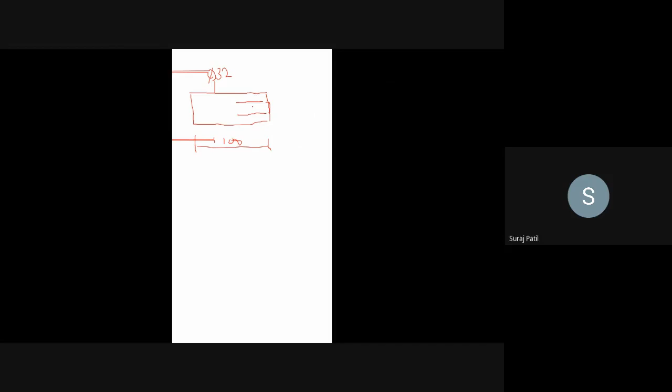There's a bar of diameter 32 mm and length of the given job is 100 mm. You need to turn, that is remove the material of the given shaft, such that the diameter at the right end should be turned to 25 mm, and the length of the turning should be 30 mm. This is the job given. You can see here 40 mm; I am going to say this should be 40 mm.

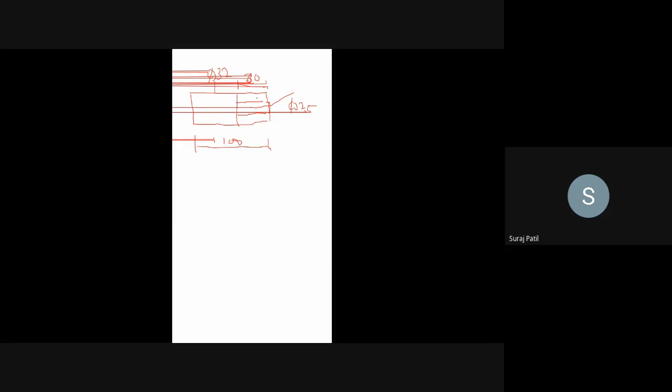This material needs to be removed using the turning operation. So you can see this is the job given. The job size is 100 mm length and 32 mm diameter shaft, and you need to turn that given shaft to a diameter of 25 mm for a length of 40 mm.

Always remember in Fanuc lathe, the axis system that we use is XZ, where X indicates the diameter of the job and Z indicates the turning length of the job. Before starting any turning job, you need to first locate the origin of the job. The origin is always located at the extreme right end, at the center of the right face, as shown in the figure. So this point, 0 comma 0, is the origin of the given job.

The operations based in this particular job are: first you need to do the facing, and then you need to turn for a length of 40 mm, such that you will reduce the 32 mm diameter to a 25 mm diameter.

For this particular job to be programmed in the Fanuc Lathe Denford software, you should know all the G codes and M codes. I am assuming that you are familiar with all the G and M codes, and accordingly I am proceeding further. If you don't know them, please go through the meanings of the G codes and M codes available in any CNC or CIM textbook.

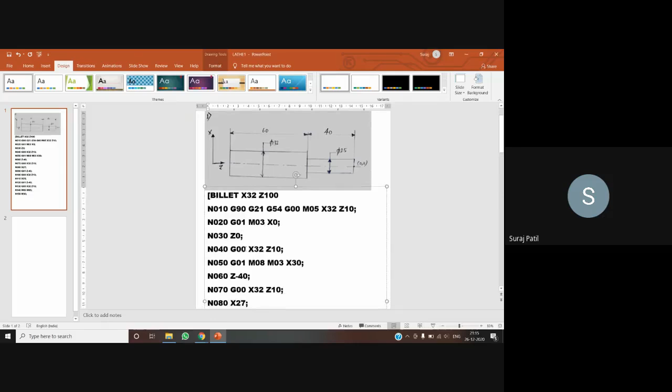Then from 30, that is from diameter 30, I'll reduce it to 27. So here I need to use G01 because I need to cut the material. So for cutting the material, you should use G01.

Otherwise, if you miss to give this G01 here, what will happen? The software will understand the previous G codes and automatically it will not cut material here. So earlier it was G00, so if you don't give G01 here, it will take G00 and proceed further. So now I have to cut the material, that is why I have used G01 X27.

So from 32, I have reduced it to 30. So again I am reducing it to 27 for a length of 40 mm. So now I have reduced it to 27 mm. Then again I'll get the tool to some safer position, that is X32 Z10.

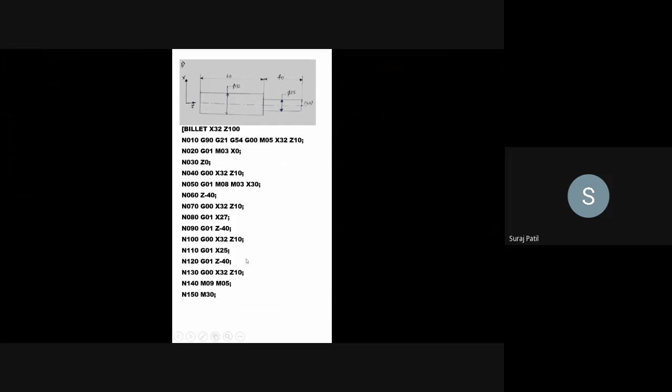Then again I'll do the machining, that is I'll do the turning, that is G01 X25, which is the required diameter. So you can see, where is that? Yeah, X25 G01 Z minus 40.

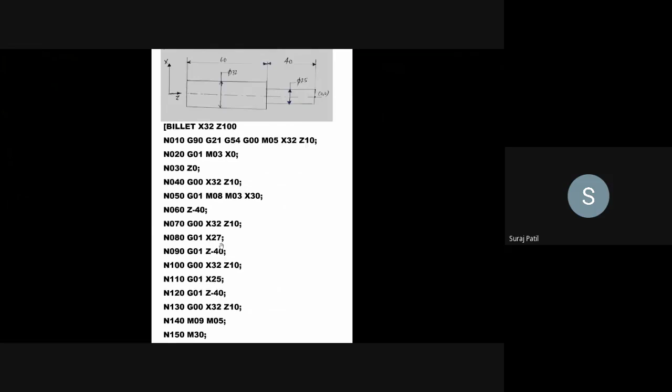So from 27, I have done the turning to a 25 mm diameter, and I have cut for a length of 40 mm, that is turning length. So you can see, I have reduced the given job to a 25 mm dia, and so my operation is complete because this is the required dimension I should have in my job. So that is why I have completed the required operation.

Now I'll ask the tool to get to some safe position, that is G00 X32 Z10. Then I'll make spindle off, that is M09 M05 M30. So this is program end. M05 spindle off, M09 coolant off. So this is the first program.

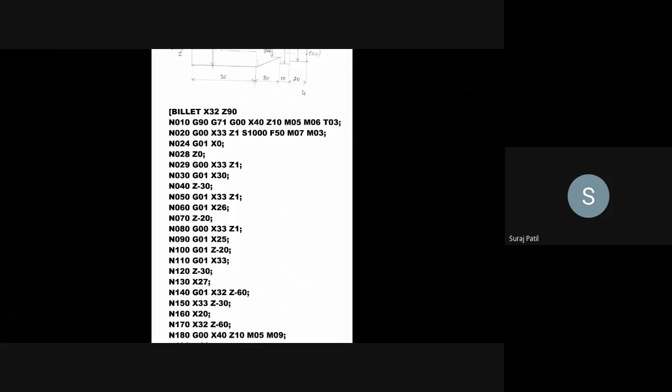So this is the job given. This is a shaft of diameter 32 and length 90 mm. You have to do a step turning for a diameter of 25 for a length of 20, then after that there is a step of 30 mm dia for a length of 10 mm, and after that there is a taper from a diameter of 20 to a diameter of 32 mm for a length of 30 mm.

So initial things remain same. I located the 0 at the left, right extreme face at the center point. First I'll do the facing operation, so I'll specify the size, that is square bracket billet x32 z90. You can see 30 plus 30, 60, 70, 20, that is 90 mm, and diameter is 32 mm. So this is the total size given.

Then first sequence number, that is first line, G90 G71, that is absolute metric. Earlier I had used G21, so you can use G71 also. G0 rapid traverse, X40 Z10, that is some safe position, that is just 5 mm above this and 10 mm to the right from this 00 position. So this is somewhere here. This is my safe position of the tool.

Spindle off. Then M06, there is one more new M code, that is M06, that is tool change. So I'll be using tool number 3, that is T03. Then G00 X33 Z1. So from this X40 position, I'll just bring tool to just 1 mm above this and 1 mm to the right side, somewhere here. So I'll ask the tool to come here.

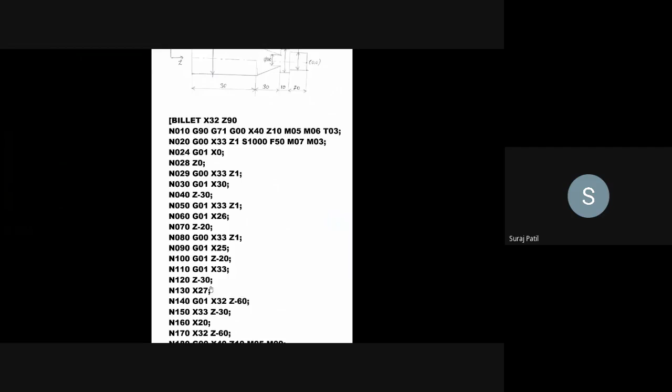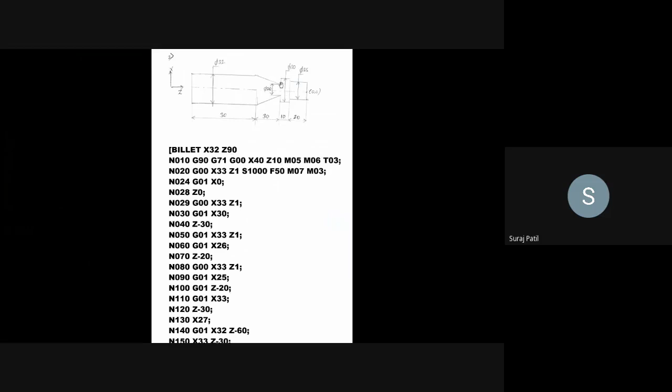So I'll give G01. Now from this 33 mm dia, I'll ask the tool to go to x27. So what will this tool do? From this x33 position, it will come to the diameter 27, getting digged into the material to a diameter of 27 mm. Then I'll specify G01 x32 Z minus 60.

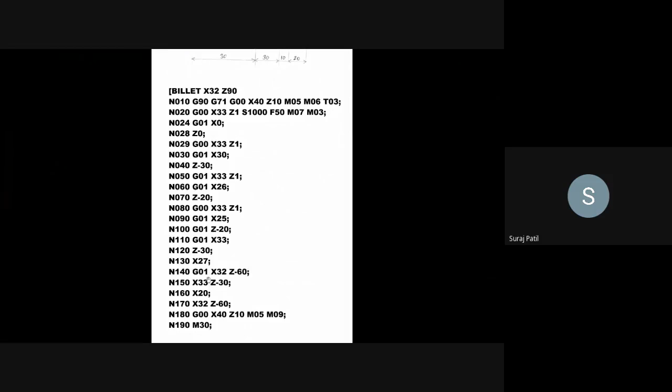That means from this 27 mm dia, it will directly do this taper, drawing this particular line. You can see x32 is this diameter. What is the length? 20 plus 10 plus 30, that is 60. So G01 x32 Z minus 60.

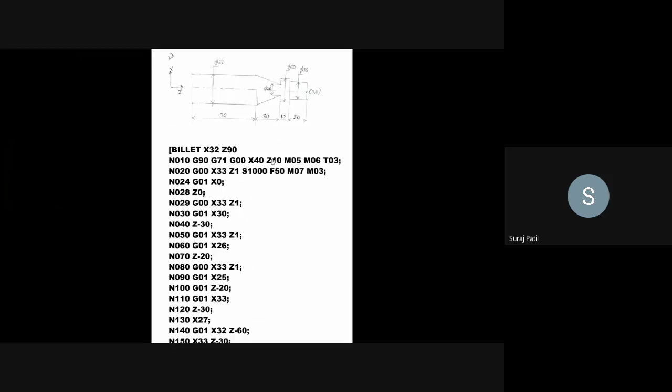Then again I'll ask the tool to come to x33 Z minus 30. So it will come just 1 mm above this and 30 mm to the left of this origin, somewhere here. Then from this position I'll directly go to 20 mm dia, so x20, and I'll give x32 Z minus 60, that means this end, this particular point. So from this x20 it will directly do the taper operation and my entire taper will be created.

That is, I'll perform all the required taper operation here by x20, then x32 Z minus 60, which gives the taper of required dimensions. Then I'll just get the tool to some safe position, G00 x40 Z10 M05, that is spindle off, M09 coolant off, and program end and rewind.

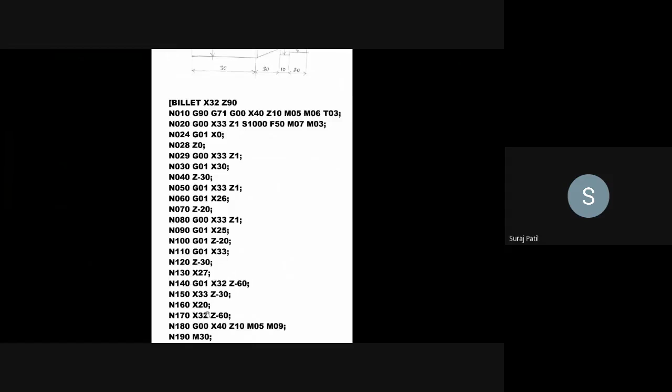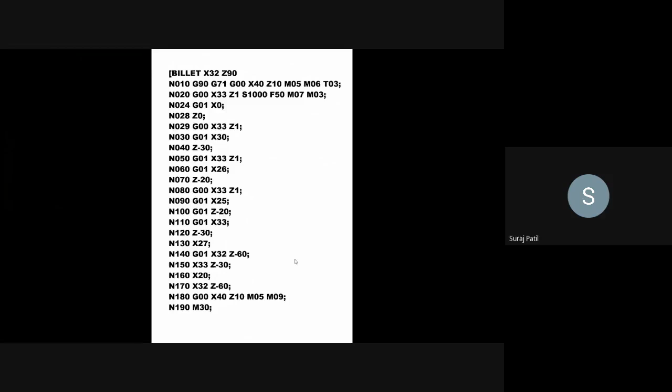So if you see, from 27 I have directly given x20, but in actual practice this is not followed. We cannot give a direct depth of 7 mm in one go, always it should be given in fractions, otherwise it will damage your tool. You should give a very small depth of cut. But as this is just a simulation, I am giving more depth of cut and performing the operations. This completes our second exercise.

Then I'll go to the third exercise, that is the threading operation, how it is done on the job along with the radius cutting.

You can see, so this is the job given. I'll just zoom it more. This is the job given. So you can see the job stock is 40 plus 30 is 70, 70 plus 15 is 85, plus 25 is 110 mm, and this diameter is 32 mm. I think it is missed here, so you take this diameter as 32 mm.

So the job stock is billet x32 Z110. You can use any case letters, it is not compulsory that you write the code in uppercase, you can use lowercase also. So x32 Z110 is the total stock given.

So from that stock we need to do the threading operation for a length of 25 mm. Then there is a step, I think this diameter I have missed, so I'll check this. What is the diameter? Yeah, it is 20 mm, so this step is 20 mm. I'll just mark it.

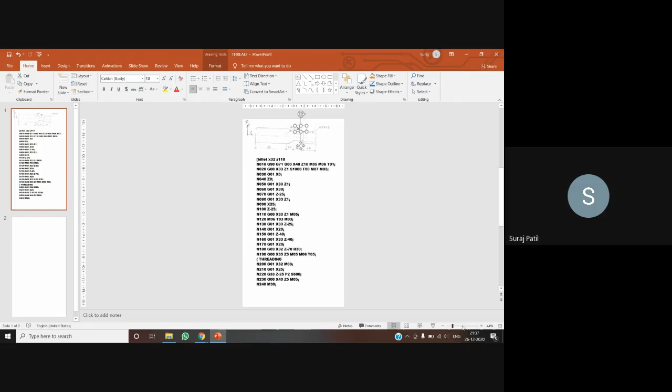So this diameter is 20 mm, and then there is a radius cutting of 30 mm radius. These are the operations that I need to perform on this particular job.

So you can see I have specified the billet size as X32 Z110, a 32 diameter shaft of length 110. So first line as it is, G90 absolute, G71 metric, G00 that is rapid traverse, X40 Z10 somewhere at a safe position at this particular corner, M05 spindle off. So first you need to check whether the machine is off or not. Then M06 tool change, T01, that is the first tool I am going to use.

You can use a tool of your choice, there is no compulsion that you should use T01. So now I'll ask the tool to get at X33, just 1 above the stock. So 32 is here, 1 above this is 33, and 1 to the right side, somewhere at this particular position. Spindle on, that is with 1000 rpm. Yes, 1000, feed rate 50.

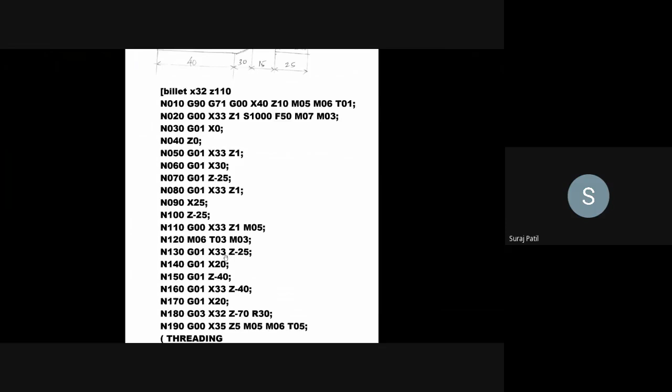Spindle on again. Then G01 X33 Z minus 25. So X33 is here, Z minus 25. So I'll bring the tool just 1 above this particular point. Then directly reduce it to X20. It is G01 X20, so I'll be cutting this step.

And what is the length of this particular step? 25 plus 15, because we are using absolute method of dimensioning, that is 40. So Z minus 40, that is X20 Z minus 40. So this particular groove has been created.

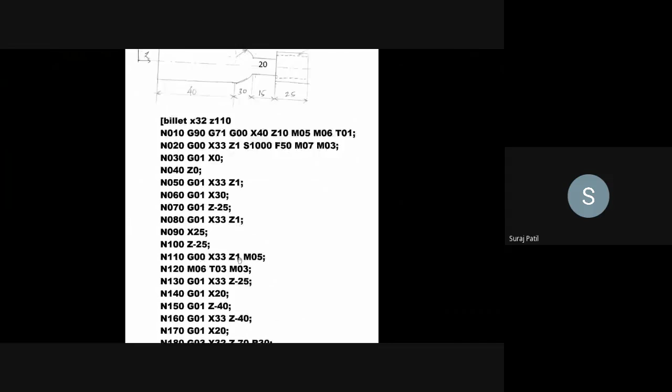Now again I'll ask the tool to get to X33 Z minus 40, that means just 1 above this, that is here, at 40. So the tool has to go at X33 Z minus 40. Then I'll ask the tool to come at X20, that means at this particular endpoint. So from this point it will directly come to X20 position because this diameter is 20. So this point is 20, and from this I'll give the radius cutting.

So G03, because there are circular interpolation codes G02 and G03. G03 is anti-clockwise direction. So you can see from this starting point, if you go along this arc, it is in anti-clockwise direction, that is why G03. If the arc would have been in clockwise direction, then the code would have been G02. But it is anti-clockwise, so we are using G03.

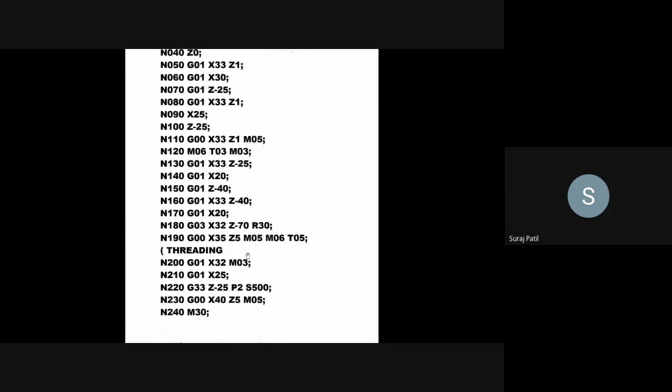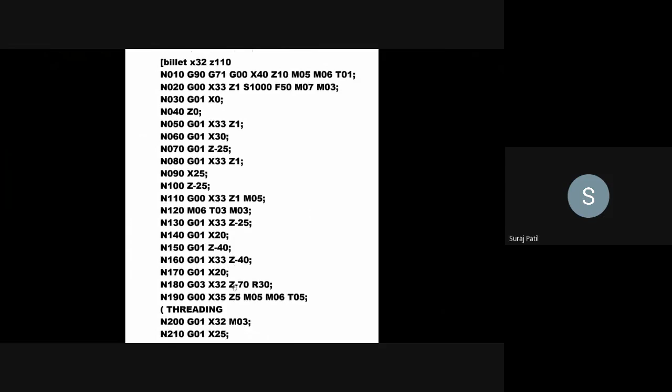You can see G03 X32 Z minus 70 R30. That means I need to specify this point, the end point of the arc. What is the diameter? This diameter is 32, so X32. What is the length? 25 plus 15, that is 40, plus 30 is 70. So you can see minus 70, Z minus 70. Then R30, that is radius cutting. So this particular line will take care of radius cutting.

Then I'll do the threading now. So N190 G00 X35 Z5, M05, that is spindle off, tool change, tool number 5 is the threading tool. So this is a safe position. I have asked the tool to come somewhere X35, 5 mm.

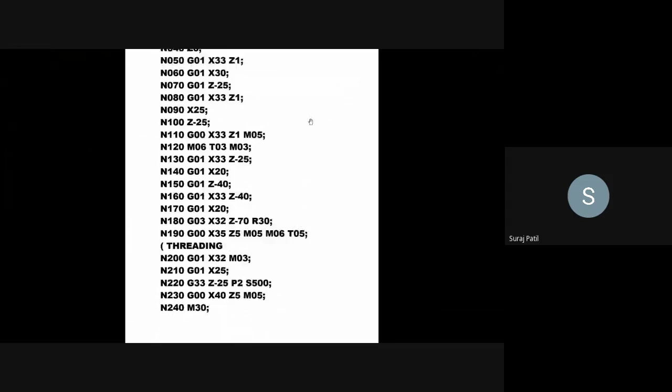Now sequence number 1, N200, G01, X32, M03 spindle on, then diameter X32. I'll ask the tool to come at X32 position, so somewhere here. Then I'll ask again the tool to come to X25, so it will just come here at this particular point.

Then I'll specify the threading cycle, that is G33 is the threading cycle G code. Z minus 25, what is the length of the thread you are giving? 25 mm. And what is the pitch? It is specified as 2 mm, that is P2, nothing but 2 mm pitch. And the spindle speed is 500 rpm, because thread cutting should always be done at a smaller spindle speed. So this particular line will take care of the threading operation.

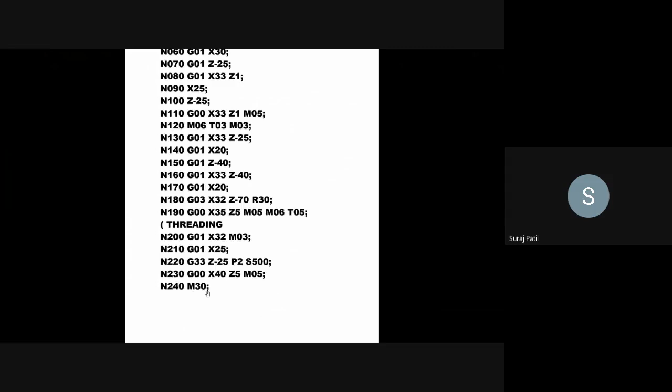Then already I have performed all the operations. So N230, some safe position, I'll get the tool, that is G00 X40 Z5, M05 spindle off, and M30 program end and rewind. So this completes the third program.

Now we'll see how to use the Fanuc Denford software to simulate this particular program. So already I have typed this program in a Word file, and I have saved those Word files as .fnc. Okay, so I'll just stop this.